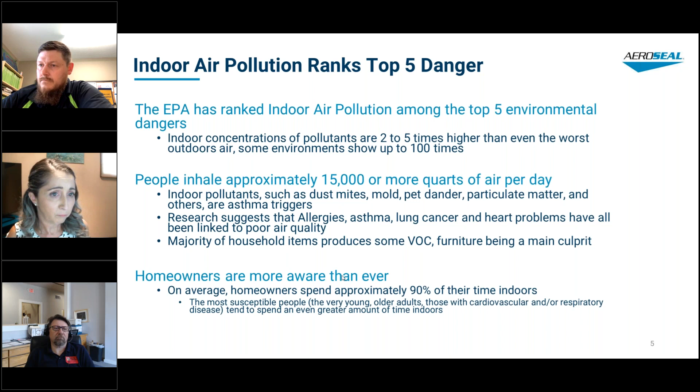If we look at HVAC specifically, your HVAC system is designed to help regulate the air in your home. The main purpose is to maintain good indoor air quality by providing adequate ventilation and filtration, and provide thermal comfort. But it's not just putting in a piece of HVAC equipment - Jeff and Rob can speak to this for hours probably. It's so important that you have properly sized systems, properly balanced systems, properly sealed ductwork, and proper filtration mechanisms. If you don't have all of that equation just right, you're going to lead to symptoms in the home like issues regulating humidity, which could lead to mold growth. You might have uneven temperatures or just a stuffiness because you don't have good ventilation or proper circulation of air throughout the home.

Ductwork that isn't sealed can lead to contaminants and polluted or unhealthy air being drawn into the indoor living space. So all of these things together, all the puzzle pieces have to work together. It's not just a matter of having an HVAC system in the house - all these other things have to be in place as well. Rob, Jeff, I don't know if you want to add anything to that. I know this is just a huge point and we could talk for a great length on this one.

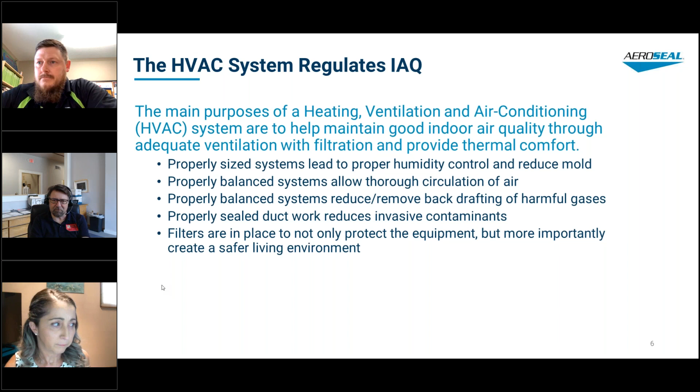Okay, let's kind of jump into selling IAQ. There are lots of sales approaches out there, but I wanted to keep it pretty simple. We like to say there are three basic components to any sale. Number one, the customer must want or need your solution to their problem. That's an obvious one, right?

And then as you describe the product or the service, the value has to exceed the price. We all know this - if we don't really drive the value home, then it's going to be all about price and how can I get that price down. You're going to run into price objections you might not be able to overcome. So really laying on the value is critically important.

And then third, the customer has to be able to afford the purchase. I look at this as kind of a relative phrase - I might have limited funds, but my priorities are the health of my family. So I might not be able to afford a Ferrari, but I'm going to prioritize my family's health, and I'm going to find a way to afford or invest in making my home healthy, if that's what's important to me, or what my trusted expert advisor recommends, which leads us into the next slide.

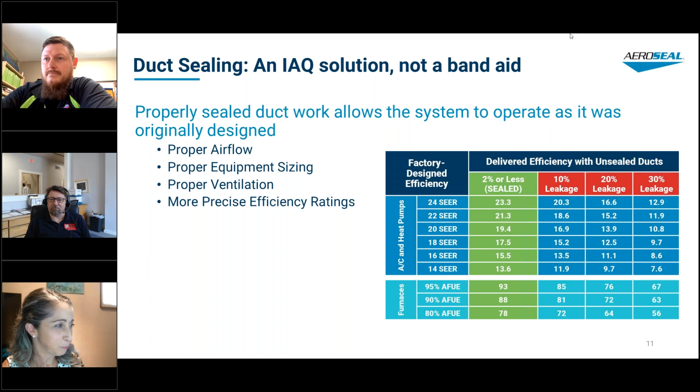So if we look at code enforcement across the country, up until about 2009, there really weren't any codes or code enforcement for duct sealing. And if you look at new construction statistics, research from a 2016 study estimates that about 96% of owner-occupied homes were built prior to 2009. So that means the majority of houses out there were built before there were codes that required certain standards for duct sealing. So if you want to equate that to the number of homes, we're talking about 115 million homes that are potentially impacted by less than perfect delivery systems, i.e. ductwork. Yep, that's huge, right?

Yeah, and they're not even insulated if they're in a crawl space or a basement at that age, in the 50s to 60s to 70s. They didn't even insulate them, much less seal them. So you're losing a lot of air, losing a lot of efficiency. Yeah, let alone what's happened with the fan energy ratings, the FER standards that changed July 3rd of last year with the equipment. It's just making it even more pronounced and known. So it's definitely very important to consider.

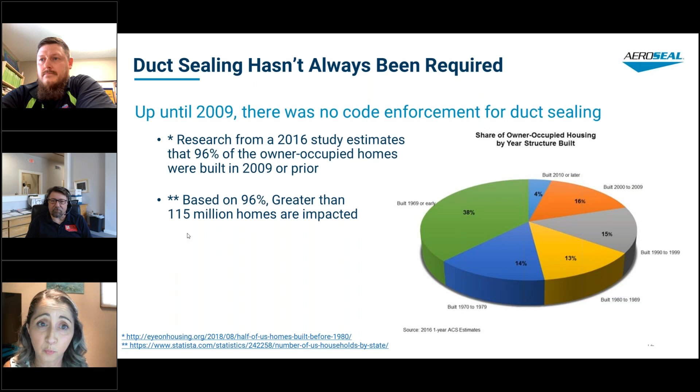But when people ask me what's Aeroseal, I like to say these three things. It truly is the safest and single most effective method of sealing ductwork available today in the universe. You like that? I do. You heard Rob and Jeff both mention you can hand seal, you can do mastic, you can do tape. There's other ways of sealing ductwork, but there really is nothing that's safer or more effective than Aeroseal.

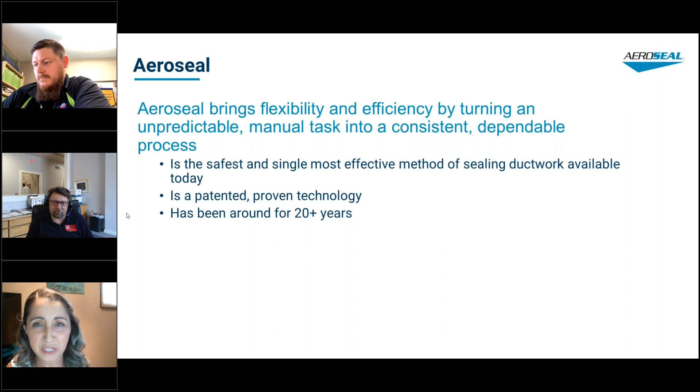And then it's a patented, proven technology. We've been around for 20 plus years. We were created by the Department of Energy in '97. So this isn't a, gosh, we hope it works. We know it works. It's been working for a very long time. And boy, we love the technology.

Talk a little bit more about what it is. Aeroseal really helps you as a home service or comfort provider. It helps you deliver or improve upon customer satisfaction. If we're looking at IAQ, Aeroseal is a root cause solution. So what I mean by that is, take a UV light. A UV light is treating the symptom, so it's treating the symptom after it's there, right? And it's trying to keep up with the amount of air quality issues that might be in the air. And they work, and they're great. But what Aeroseal does is it attacks it on the other end. So it pinpoints what's causing the problem, the leakage, which is pulling in the contaminated air. It pinpoints that issue, and it solves the problem by sealing up those leaks. So we call it a root cause solution.

And I know Rob and Jeff are going to talk a little bit more about this in a second. We like the way Aeroseal and other IAQ products work together. We're not necessarily trying to say you don't need other IAQ products. We're saying they work together, but they work in very different ways.

Another point about Aeroseal is it is a permanent solution. Once it's done, you don't need to do it again. The duct sealing technology has been stress tested to last beyond 40 years.

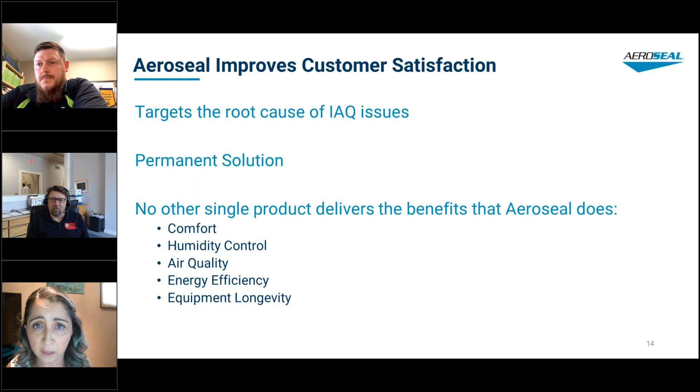And then something else that's really cool about Aeroseal, we can't think of another product in the industry that solves, in a root cause kind of way, as many issues in one single solution as Aeroseal. So Aeroseal can improve comfort. It can help balance humidity in the home. It can improve air quality. It can help improve energy efficiency. And then a big one, it can improve the longevity of the HVAC equipment. Duct leakage can put a burden on the HVAC equipment and actually shorten the lifespan of that equipment. So that's very important to homeowners.

What else about Aeroseal? When it entered the market, it really redefined the way duct sealing was done. It seals the ductwork from the inside. You heard Jeff say you're not going to get below 5% without tearing down some walls. Well, Aeroseal doesn't have that limitation. Because we're sealing from the inside, our technology can get behind walls, behind floors, into spaces where your hands can't reach. So if you're trying to hand seal, you can only seal what you can reach. Aeroseal just doesn't have that limitation. So that's a huge advantage for the folks who have Aeroseal.

And then we're able to seal holes that are up to about 5/8 of an inch. If you encounter holes that are bigger than that, we're going to recommend that you hand seal first if possible.

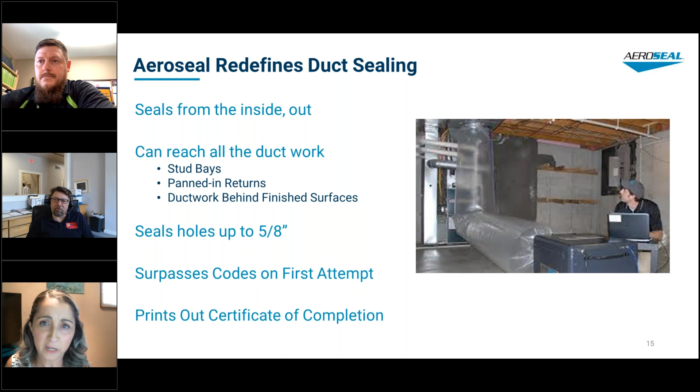Real quick, how it works. We generally see 2-man crews, and I'll let Jeff and Rob talk in more detail about this. The day of the job, they're going to go to the home. They're going to locate every supply and return register in the home. We're going to block every one of those openings with a dense piece of foam, a foam block. Then we're going to tape that block in place as well. In addition to that, we're going to block off the coil and the fan.

There are different ways to block off the coil. Sorry, I got ahead of myself. Different ways to block off the coil. You'll see some guys use foam, some guys use sheet metal, different approaches. But ultimately, you gotta isolate it and block it off so we don't seal the coil. And then we're going to attach a long piece of plastic tubing that we call layflat. We're going to attach that to the air handler at an access point. We call it an injection point. We're going to clamp it on.

The other end of it's clamped on to the Aeroseal fan box. And then we're going to pressurize the system, putting high pressure air into the ductwork.

Air always moves from high pressure to low pressure, so our system can detect those pressure drops. Wherever you have leaks, the air is trying to escape, and our instrumentation can measure those pressure drops and tell you how leaky it is, or how big of a hole your total leakage equates to.

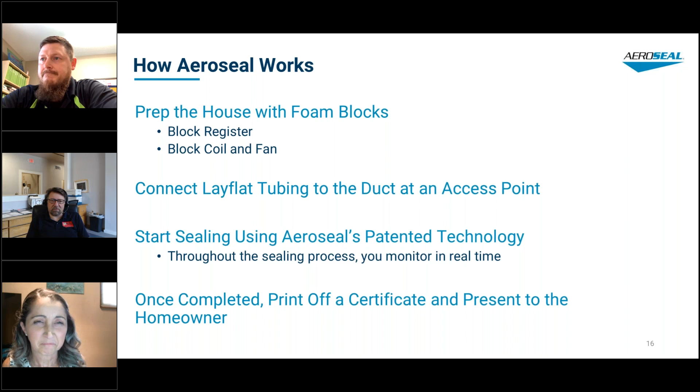Just to give you guys a visual of what the process looks like, we have a short animation here, so I'll play this. There's no sound, so don't worry if you don't hear anything. Well, maybe I'll play it. I will not be playing it. It is not playing, and I apologize. There's your glitch, Billy. It's okay, no biggie, so I'll just walk you through what you would have seen.

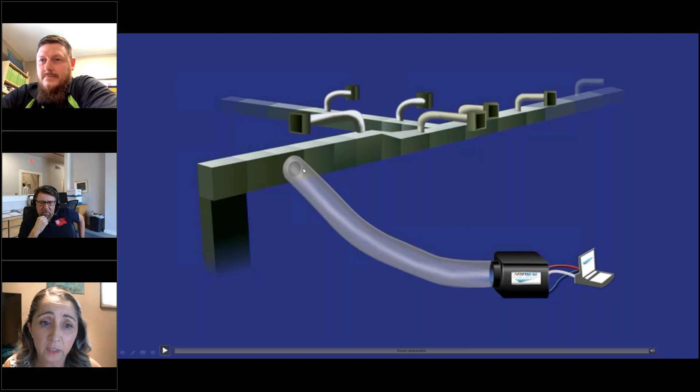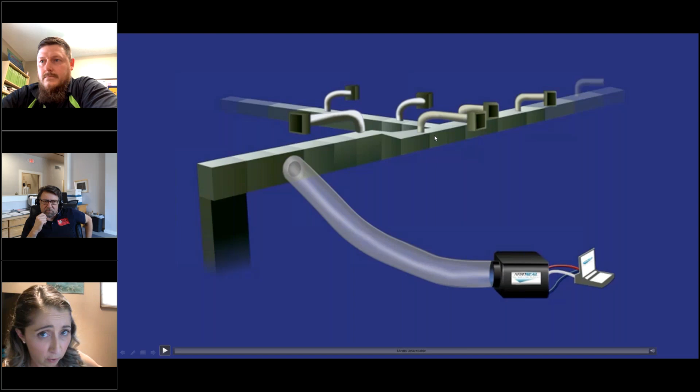You can see there's a computer monitoring what's happening throughout the process as we described. This is what we call the fan box, and it has all the components inside that regulate the temperature. This is also attached to a compressor, so that's how you're regulating pressure. This has the pump inside, where you're pulling the sealant from the gallon of sealant. Then there's an injection system that atomizes the sealant and takes it from a solvent to a dry airborne mist. It travels through this lay-flat tubing into the ductwork, and every register is blocked off, so the only place the air can escape is where there are leaks, gaps, holes, and cracks. The particles collide and form a seal where there are leaks. So sorry I couldn't play that for you, but hopefully I did an okay job explaining it.

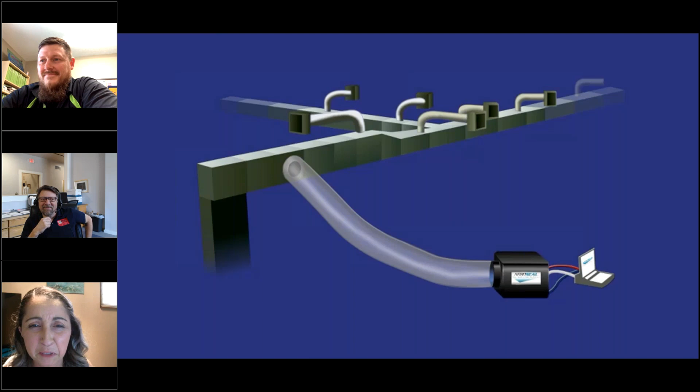Even with a brand new duct system that we had put in, that's still the leakage that's there. We didn't tape, we didn't mastic, we didn't do any of that on the actual ductwork itself. We did around the equipment, but you can see how well we were able to get that down. Same thing on the return, and that's with wall cavities. We were very, very impressed and satisfied with how well we got that down.

I actually just spoke with the homeowner a little bit ago, and she said that she has never been so comfortable in her house, especially in the back bedrooms, where now she's getting air where she wasn't before. So we're very, very happy with it.

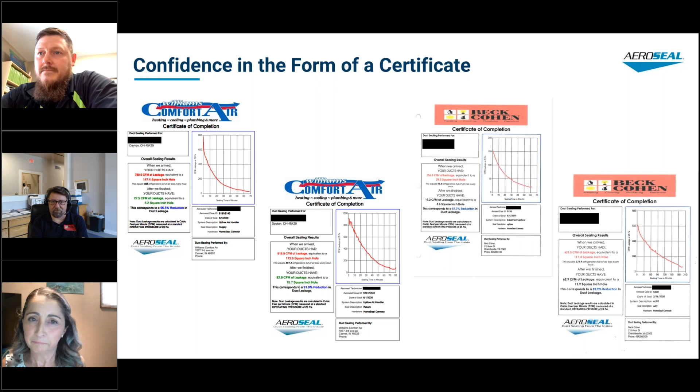All right, quick summary, and then I'm moving to questions. Focusing on IAQ, whether it's Aeroseal or other IAQ products and services you offer, it's going to help you grow your business and recover lost revenue. We talked about only getting 1% of the 33 billion out there, that's some missed opportunity. So focusing on IAQ can help that 1% go up to something bigger than 1. It's going to help you increase your average ticket sale for sure.

This is something that can really help you even out the peaks and valleys we see in the industry. We see summer and winter as our busy times, and then those mild temperatures, things can sometimes slow down. So focusing on IAQ can help you even out your business.

And then my favorite point is customer satisfaction. We're doing what we do to make our customers happy, and to make money, of course, but they're not going to call you back if they're not satisfied. So coupling IAQ with everything else that you do can reduce the number of callbacks that you get. It can improve your customer satisfaction in terms of business reviews, and it can absolutely help you differentiate your business.